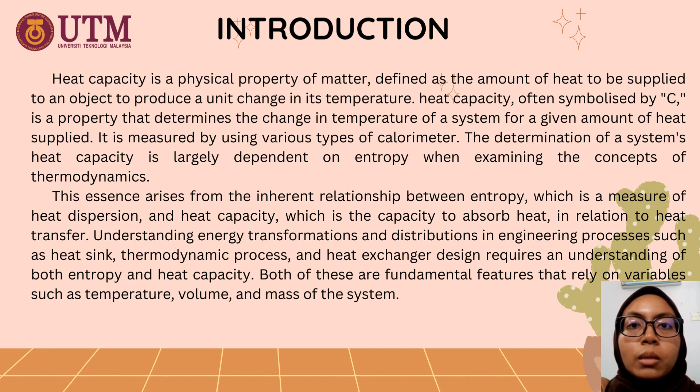The objective of this experiment is to estimate the heat capacity of different metals provided, and also to estimate the entropy generated when these metals are dropped in a container containing water. For the scope part, we are using different types of metals which consist of aluminium, copper, and iron. Then, the temperature of hot water will be limited to 80 degrees Celsius only. And also, the temperature readings are recorded after each 10-second interval.

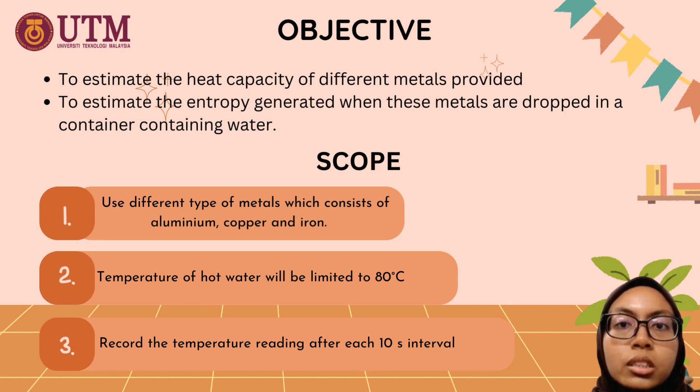So the theory: specific heat capacity is the amount of heat required to raise the temperature of a substance by 1 degree Celsius per unit mass. The amount of heat released by the warmer body matches the amount of heat retained by the cooler body when two bodies of different temperature exchange heat and an intermediate equilibrium temperature is achieved. This is proven as long as no heat is lost to the environment.

In this experiment, a heated solid with known mass and temperature is dropped into a calorimeter with cold water with known mass and temperature M2. The temperature at equilibrium is then measured. The quantity of heat received by water must equal the magnitude of heat lost by the solid.

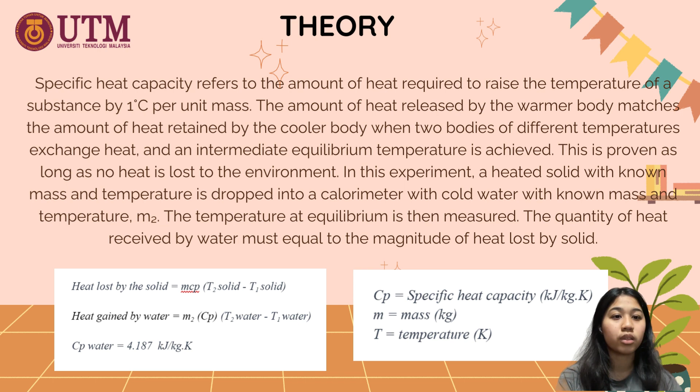So the equation that we obtain is: heat lost by the solid is equal to M Cp (T2 solid minus T1 solid). Heat gained by water is equal to M2 Cp (T2 water minus T1 water), and Cp water is constant, which is 4.187 kJ/kg·K.

The change in the system's internal energy is delta U equals Q minus W. According to the first law of thermodynamics, Q is positive when heat enters the system, and W is positive when the system does work on its surroundings. In an adiabatic process, the system does not exchange heat with its surroundings, so Q equals 0. And in adiabatic expansion, the internal energy decreases. It refers to a drop in temperature.

According to the second law of thermodynamics, a process must always occur in the direction of increasing entropy, which is Sgen greater than or equal to 0, because a process can occur in a certain direction, not in any direction. In this experiment, the direction of the process is that heat energy is transferred from the high to the low temperature body.

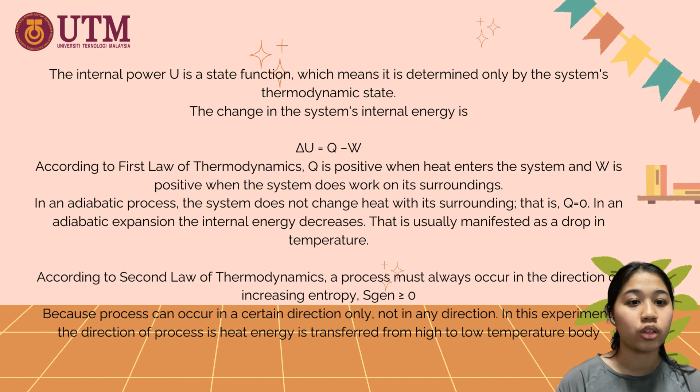Entropy generation refers to the increase in entropy in a system due to irreversibility. The second law of thermodynamics dictates that entropy tends to increase in an isolated system. A system's or its surroundings' entropy change might be negative, but delta S total, which is the total entropy generation, is positive. The process must progress in the direction that is consistent with increasing entropy, which is Sgen greater than 0.

Entropy generation measures the magnitude of the irreversibilities present during the process. In this experiment, the direction of process heat energy is transferred from high to low temperature body. The entropy created during this procedure is calculated as follows: delta S equals mCp ln T2 over T1. So delta S total equals delta S metal plus delta S water.

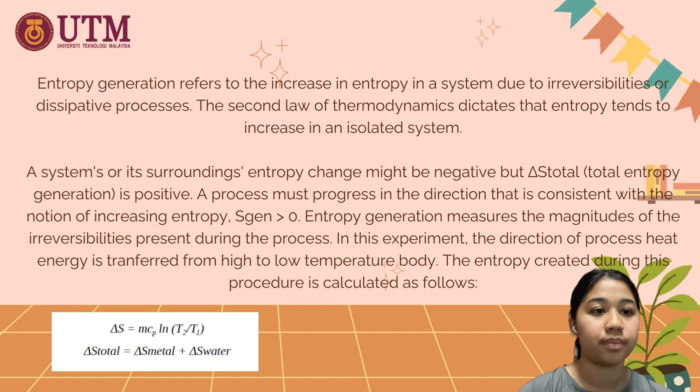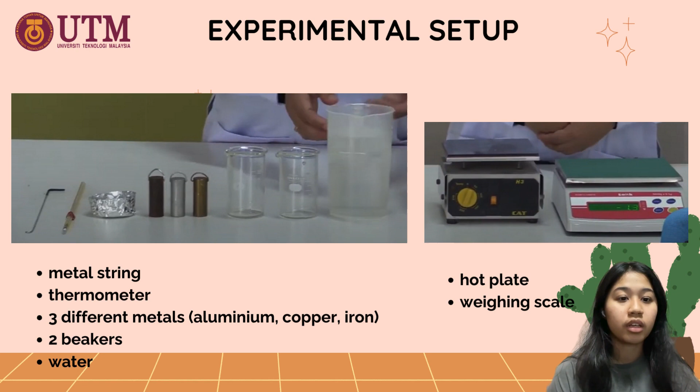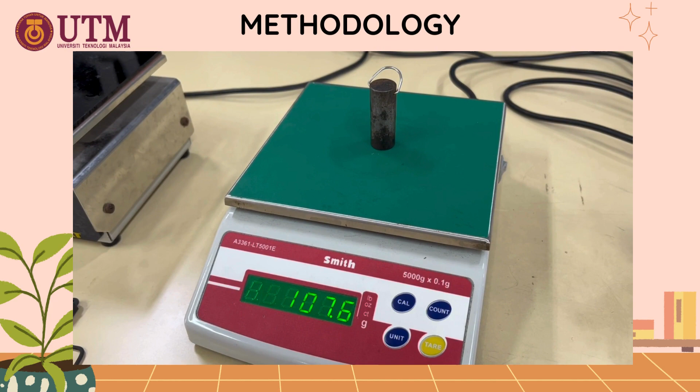I will proceed with the experimental setup. In this experiment, we use a metal string, thermometer, 3 different metals which are aluminium, copper and iron, 2 beakers, water, hot plate and weighing scale. First, record the weight of the iron block by using an electronic balance. Next, record the weight of the aluminium block. And lastly, record the weight of the copper block by using the electronic balance.

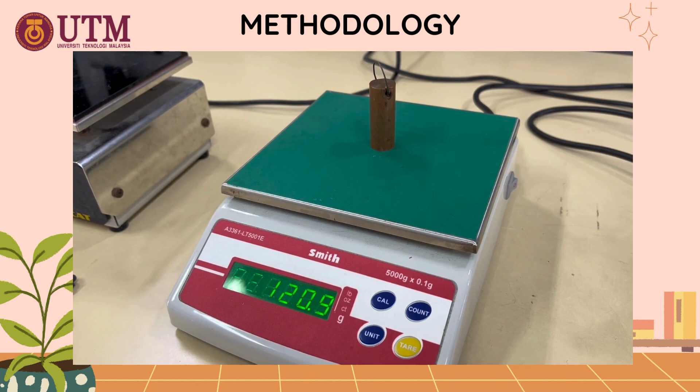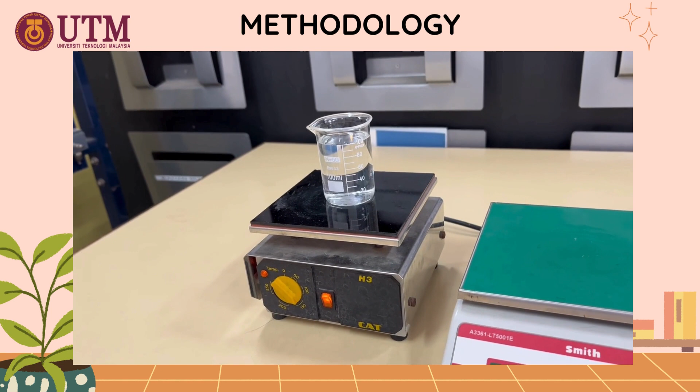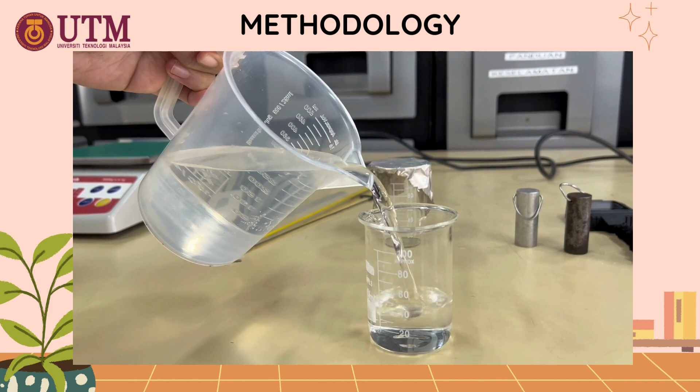Next step, pour 100 ml of water into a small beaker. Next, heat up the water using the hot plate. Attach the copper block to the metal string and submerge the copper block fully in the water. Pour 100 ml of water into another small beaker and record the initial temperature of the water.

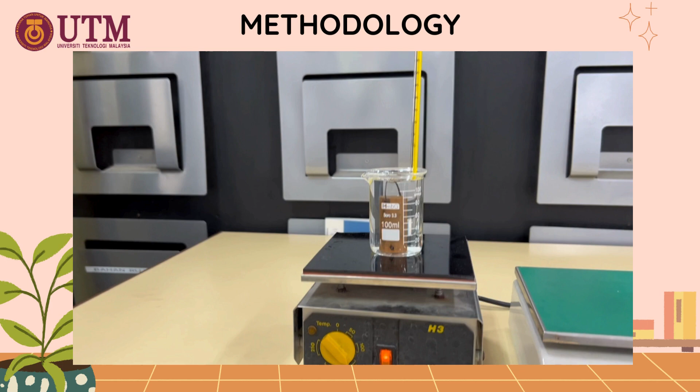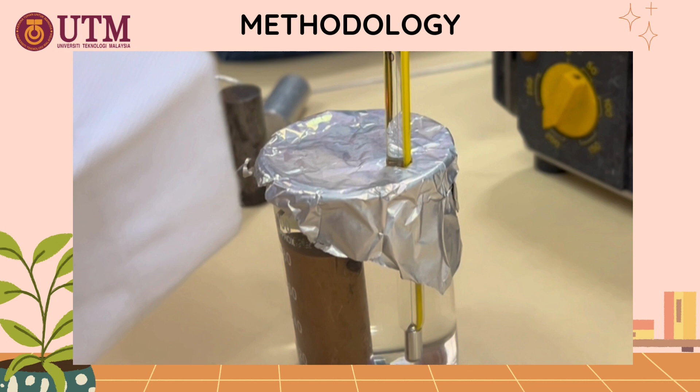Continue heating the copper block and the water until it reaches 80 degrees Celsius. Once the beaker containing the copper block reaches 80 degrees Celsius, take out the copper block and submerge it into the water that has already been filled in beaker 2. Cover the beaker using aluminium foil to minimize the heat loss and record the temperature of water according to the time interval until it reaches constant temperature. And the last step, repeat the experiment using the aluminium and the iron block.

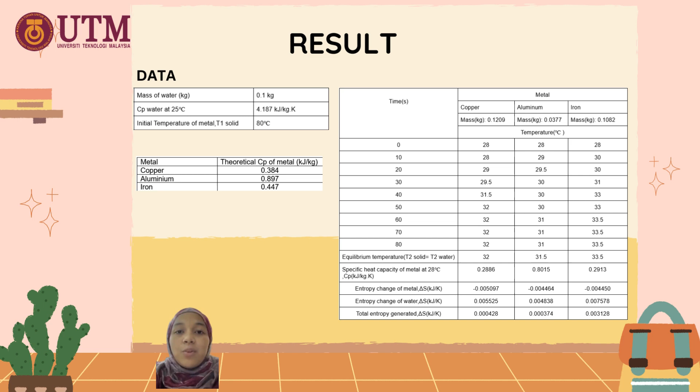This is the table of results for this experiment, where we recorded the temperature of water when different heated metals were submerged in the water with a time interval of 10 seconds. We also calculate specific heat capacity of metal, entropy change of metal, entropy change of water, and total entropy generated. The formula to find Cp of metal is mass water times Cp water times (T2 minus T1) water, divided by mass metal times (T2 minus T1) metal.

For example, for copper, Cp equals 0.1 times 4.187 times (32 minus 28) over 0.1209 times (32 minus 80), and then we get 0.2886 kilojoule per kilogram Kelvin. For aluminium, Cp equals 0.8015 kilojoule per kilogram Kelvin, and for iron, Cp is 0.2913 kilojoule per kilogram Kelvin. For entropy change of metal, the formula is delta S equals mass metal times Cp metal times ln T2 over T1.

So for copper, delta S is 0.1209 times 0.2886 times ln (32 plus 273.15) over (80 plus 273.15). Then we get negative 0.005097 kilojoule per Kelvin. For aluminium, the delta S we get is negative 0.004464 kilojoule per Kelvin. And for iron, we got negative 0.004450 kilojoule per Kelvin.

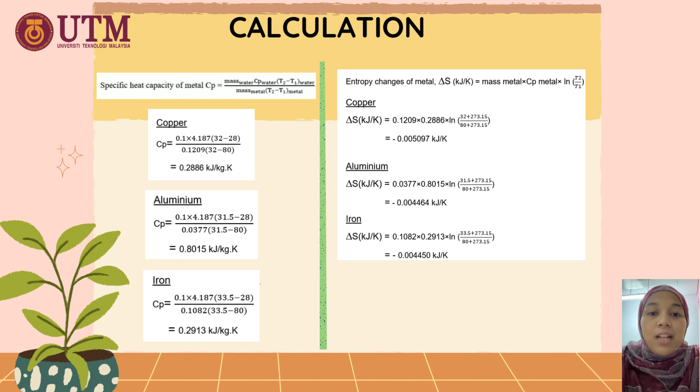For entropy change of water, the formula is similar to entropy change of metal, just using water instead of metal. The formula is mass water times Cp water times ln T2 over T1. So for copper, we got 0.005525 kilojoule per Kelvin. For aluminium, we got 0.004838 kilojoule per Kelvin. And for iron, we got 0.007578 kilojoule per Kelvin. For total entropy generated, we use entropy change of metal plus entropy change of water.

So for copper, we got 0.000428 kilojoule per Kelvin. For aluminium, we got 0.000374 kilojoule per Kelvin. And for iron, we got 0.003128 kilojoule per Kelvin.

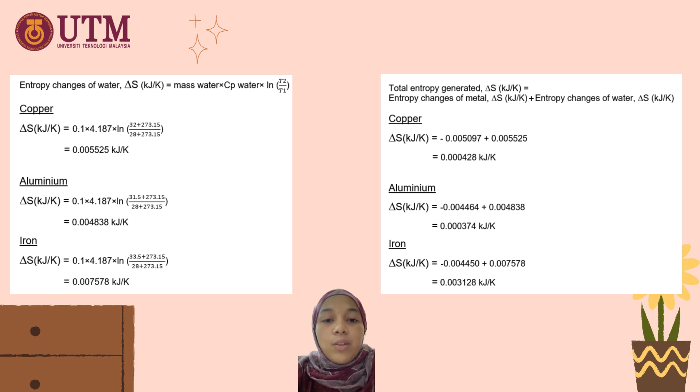For discussion, the question asks to compare estimated heat capacity with literature or existing data, which means we have to find the percentage error. The formula of percentage error is Cp experimental minus Cp theoretical over Cp experimental times 100. Cp theoretical is a fixed value which we can obtain.

So for copper, the percentage error is 33.06%. For aluminium, using the same formula, we got 11.92%. And for iron, we got quite a high percentage error, which is 53.45%.

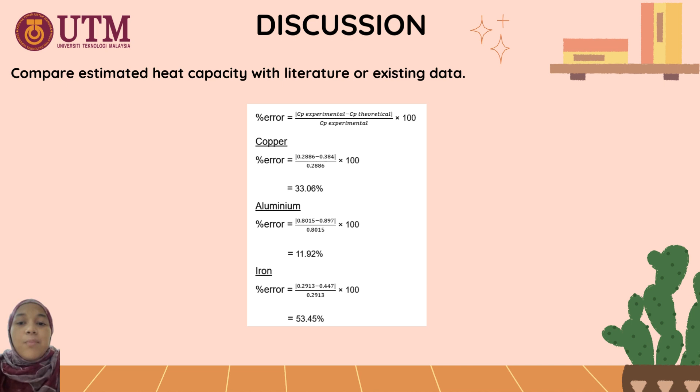So this is the bar chart of specific heat capacity of metals. So as we can see, the highest specific heat capacity is aluminium, which is 0.8015, and following the aluminium is iron, which is 0.2913, and slightly below it is copper, which is 0.2886.

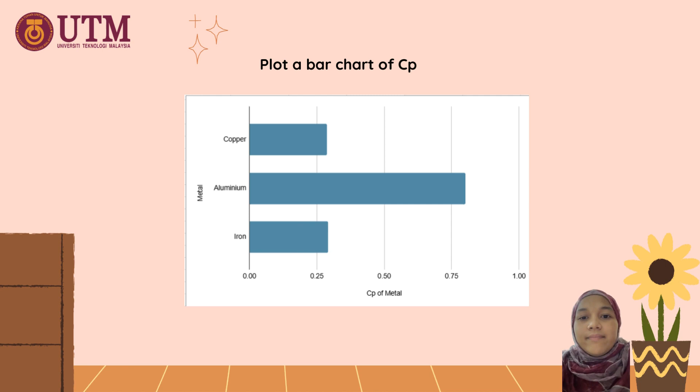The question also asks to discuss the total entropy generated during the process. Total entropy of a system can only increase or remain constant in any process and never decrease in value. If there is no net change in entropy, the process is reversible. Increasing entropy change indicates an irreversible process.

Since we obtain a positive value for the entropy change from our calculation, it shows that there are some errors that occurred, as we supposedly obtain no net change in entropy as it is a reversible process. This process is reversible as thermal equilibrium between water and metal will occur, hence the metal can be heated repeatedly.

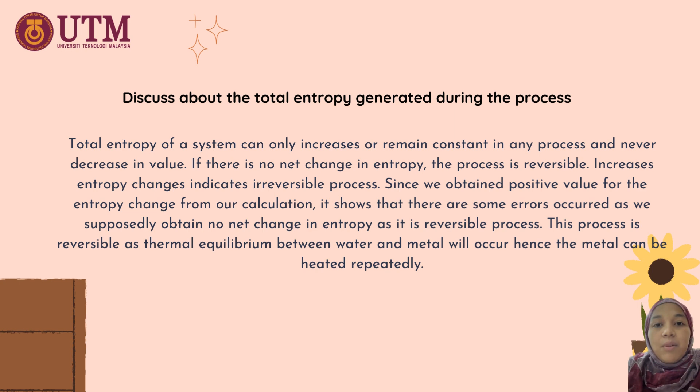There are three sources of error that may affect our experiment result. The first one, parallax error, which is error while taking measurements such as thermometer readings. The second one, the beaker is not isolated, resulting in heat loss to surroundings. And the last one, volume of water may not be accurate as a measuring cylinder was not used during the experiment.

So the methods to minimize the error: the first one is ensure eye level is perpendicular to the scale before measuring. Second one, ensure the beaker is isolated. And the last one, use a measuring cylinder to measure 100 ml of water before transferring into the beaker.

Next, justification on the importance of stirring the water in the container. While the metal is submerged in the water, it is compulsory to keep stirring the water during every significant second to ensure the heat from the metal is evenly distributed throughout the water in the beaker, hence improving efficiency of heat transfer while minimizing the error occurred.

Next, justification on the importance of transferring the hot metal quickly into the water. The heated metal has a higher temperature compared to the surrounding air as soon as it is taken out from the beaker. Hence, heat transfer will occur to reach thermal equilibrium since there are two bodies in contact with each other and can freely exchange energy, which we want to avoid as it may affect our result.

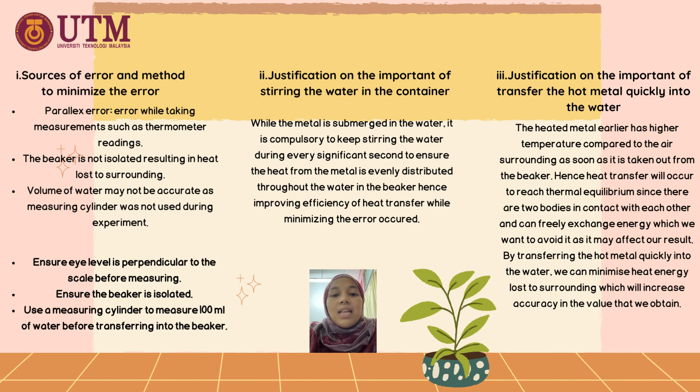By transferring the hot metal quickly into the water, we can minimize heat energy loss to surroundings, which will increase accuracy in the value that we obtain. For the conclusion part, we know that the heat capacity of the aluminium block is the highest, which is 0.8015 kilojoule per kg Kelvin, while the lowest heat capacity is the copper block, which is 0.2886 kilojoule per kg Kelvin.

For the overall entropy, we know that the iron block has the highest entropy, which is 0.003128 kilojoule per Kelvin, while the lowest entropy is the copper block, which is 0.000428 kilojoule per Kelvin. The estimation of the heat capacity and entropy generation experiment provides valuable insights into the thermal properties of the material under investigation.

The method employed allowed a thorough analysis of heat capacity, indicating the amount of heat required to raise the temperature of the material. The result highlighted variation in heat capacity among the tested materials, which are the iron block, aluminium block, and copper block, shedding light on their ability to store thermal energy.

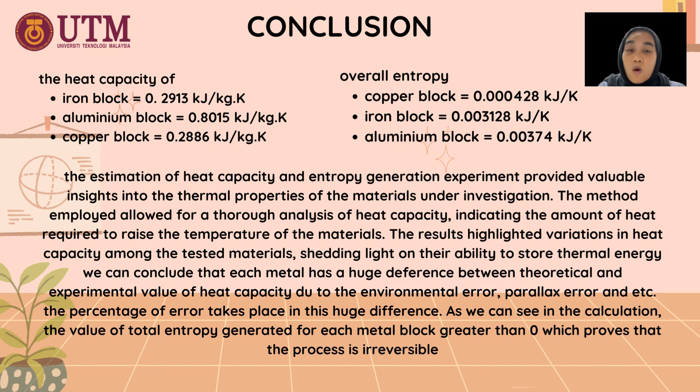We can conclude that the metal has a huge difference between theoretical and experimental values of the heat capacity due to environmental error, parallax error, and so on. The percentage of error reflects this huge difference, as we can see in the calculation. The value of the total entropy generated for each metal block is greater than 0, which proves that the process is irreversible.

The safety procedures of this experiment are, first, make sure the position of the eyes is perpendicular to the thermometer reading to avoid parallax error. Next, wear heat-resistant gloves while handling the hot beaker. And the last one, stir the water carefully using the thermometer to get a constant heat distribution.